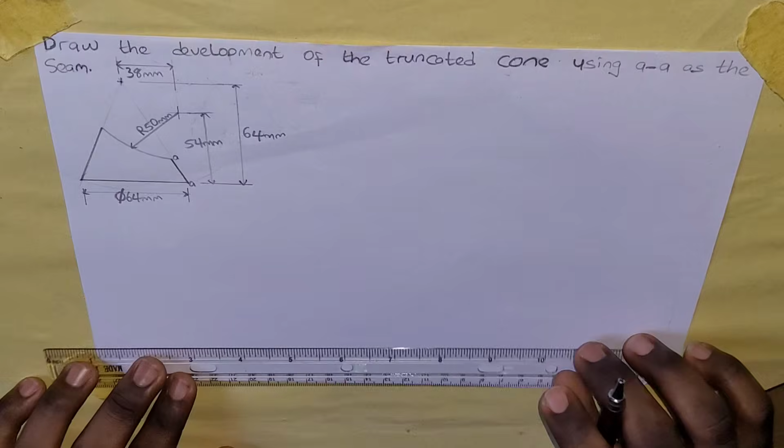Today we're going to be working on the development of solids. The question says, draw the development of the truncated cone using AA as the seam.

So this is AA. When they say using AA as the seam, it simply means we're going to draw the development done like this. They say we should draw the development of the truncated cone using this side as the seam, so our development is going to be done this way.

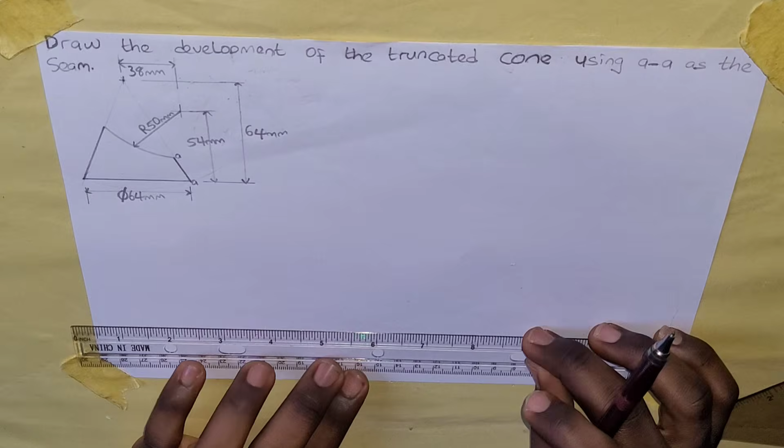The first thing we're going to do is get this shape on our paper. So we're going to start with a horizontal line.

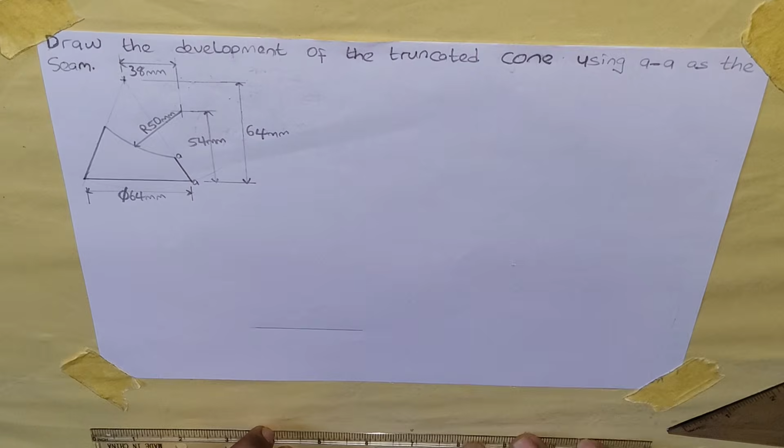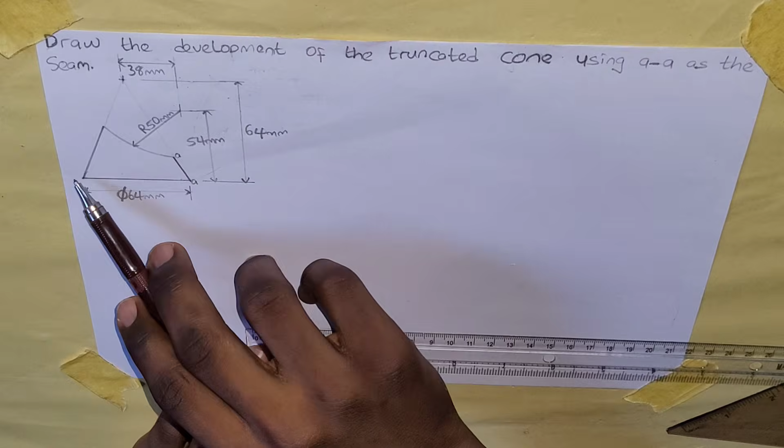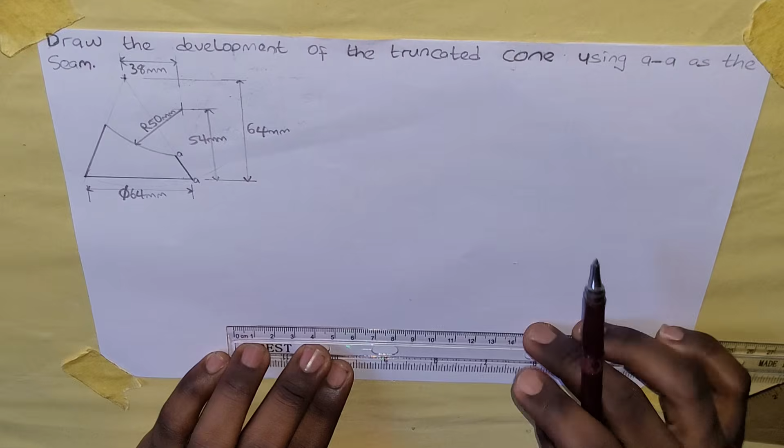On this horizontal line, I'm going to measure the distance from here to here, 64 millimeters.

Next, the cone is like a triangle, so in order to get this diagram, we have to first get the complete triangle. The distance from the base to the top is 64 millimeters, that's the perpendicular height. I'm going to find the midpoint of this line first.

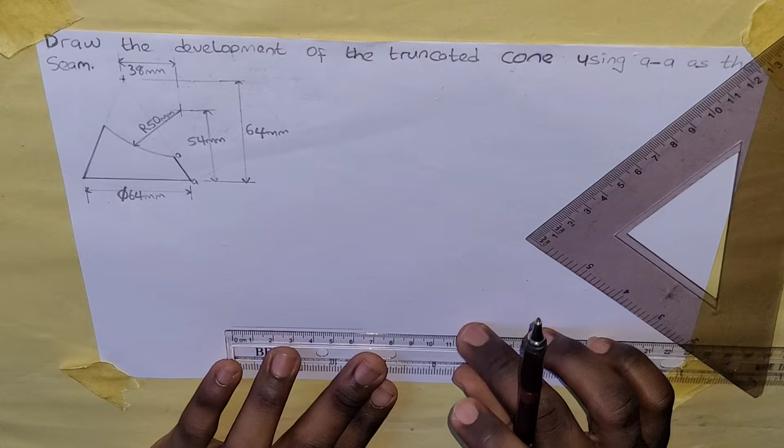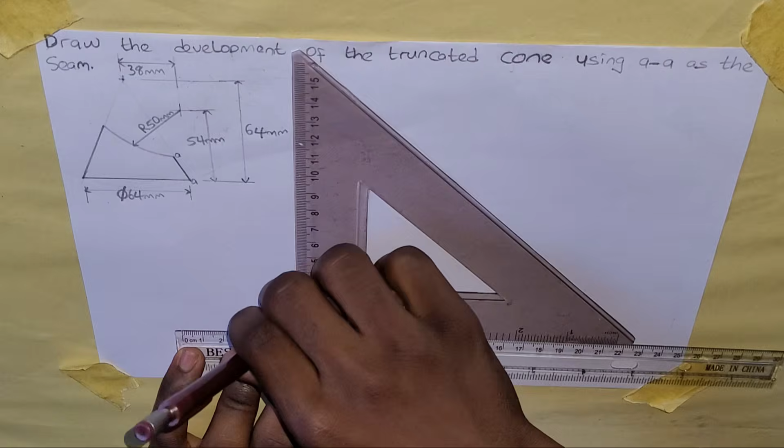Half of 64 is 32, so I'm going to mark 32. From this point, I'm going to draw a line upwards, then measure 64 millimeters on this line.

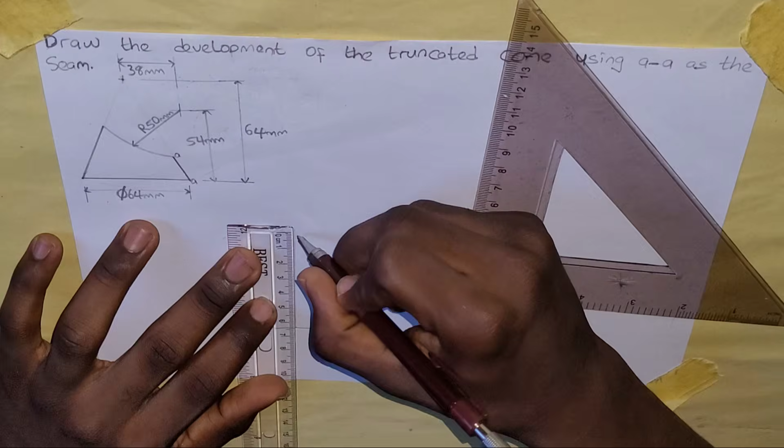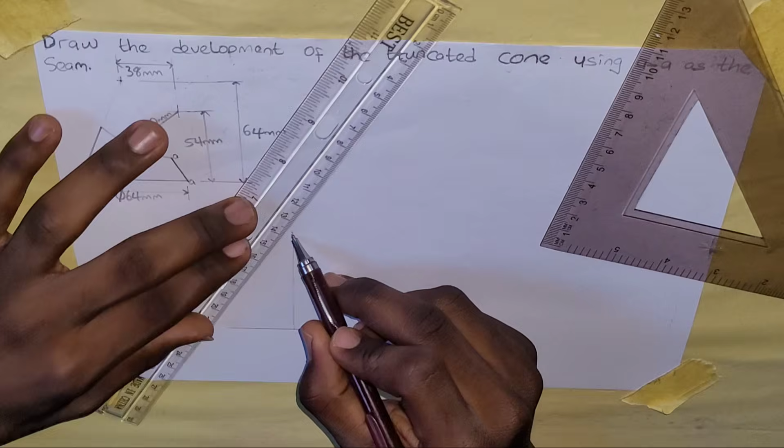Now from this point, this is where the triangle will be formed, so initially I'm going to draw this with thin lines, because this triangle is not the actual object we want to draw.

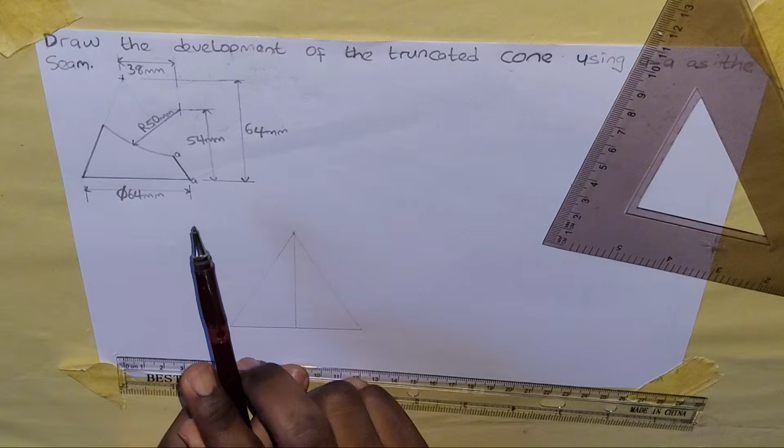The next thing I'm going to do is get this curve here. As you can see, they first got the curve. To get the curve, we have to get this point where our compass will be on, so we'll measure a distance of 38 from this topmost part.

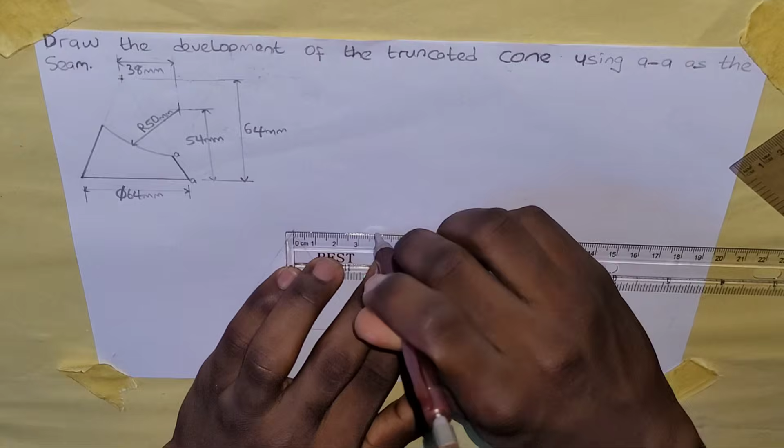From this point, I'm going to draw a line through it.

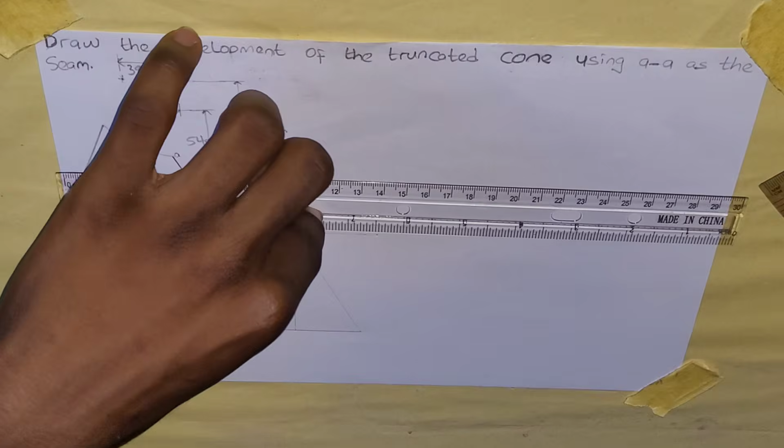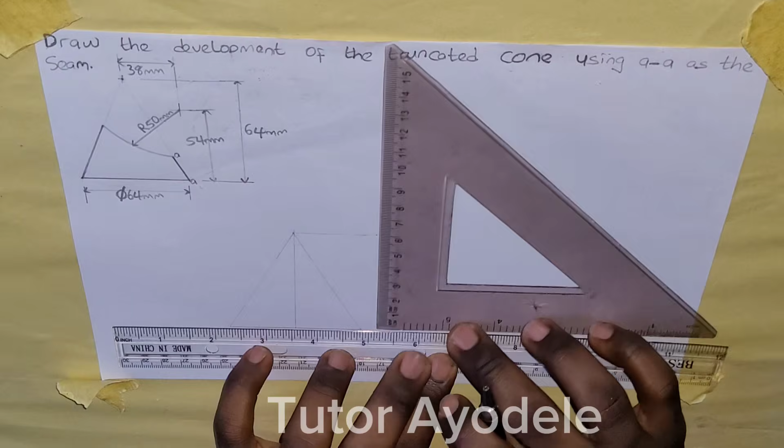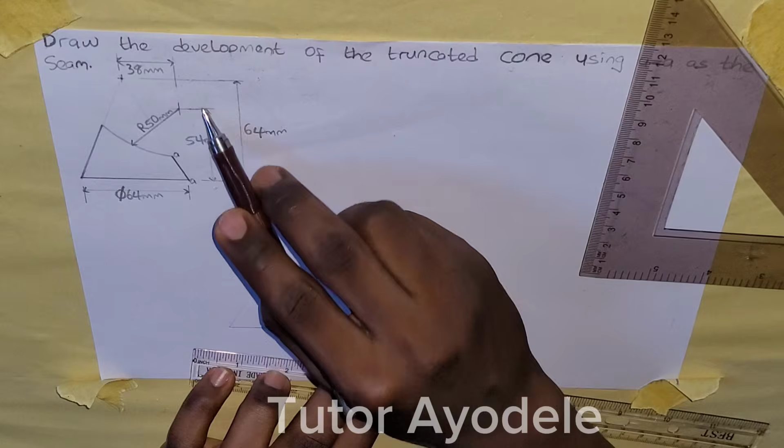So from the base to this point is 54 millimeters. I'm going to measure 54 millimeters.

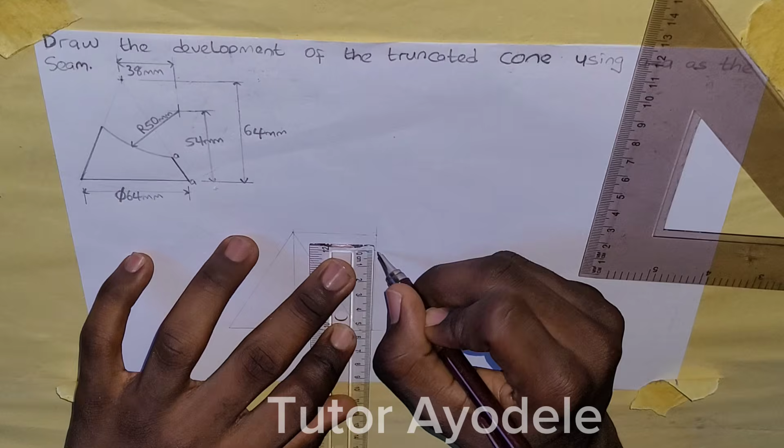Now from this point, using my compass with a radius of 50, we'll put it on this point and draw an arc.

So now we can take out the actual drawing. This is the actual drawing that we are meant to draw.

The next thing to do is, after we've gotten this drawing, we are going to draw a semicircle under this, at the base of this triangle.

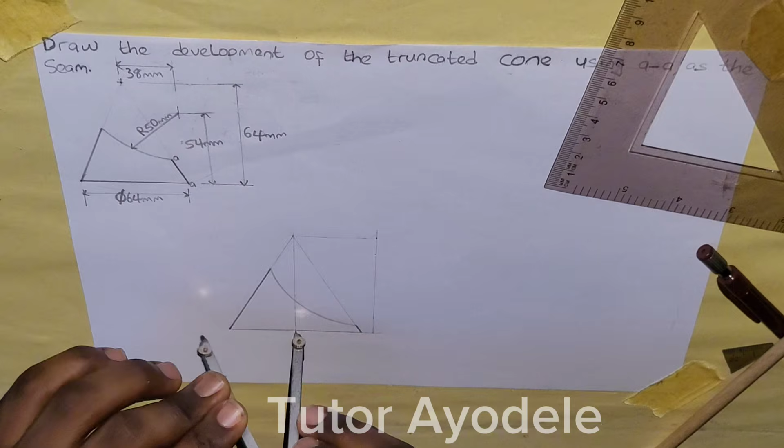Using our compass, we'll put it at the middle, get the radius, and draw our semicircle at the base of this triangle.

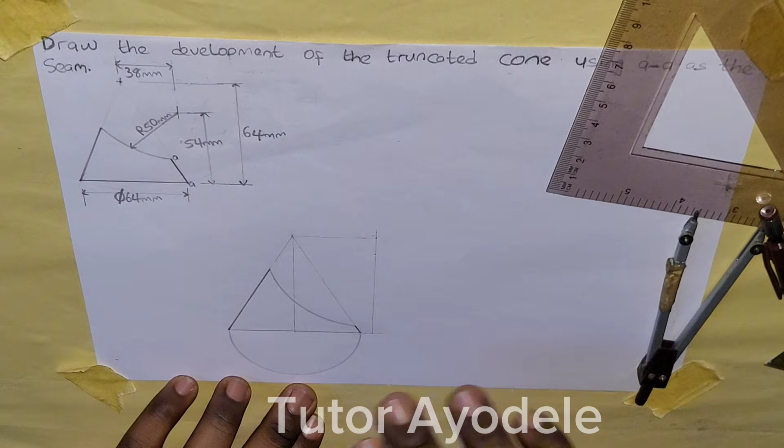The reason for the semicircle is because this is a cone, and because it's a cone, its base is like a circle. The cone, when divided into 6 parts, will have its divisions a bit different from the normal way a line will be divided into 6 parts. So with this semicircle, it can help us divide the line into 6 parts accordingly, because it's a circle. If it were a straight line, it would be equal, but because it's a circle, it's not going to be as equal.

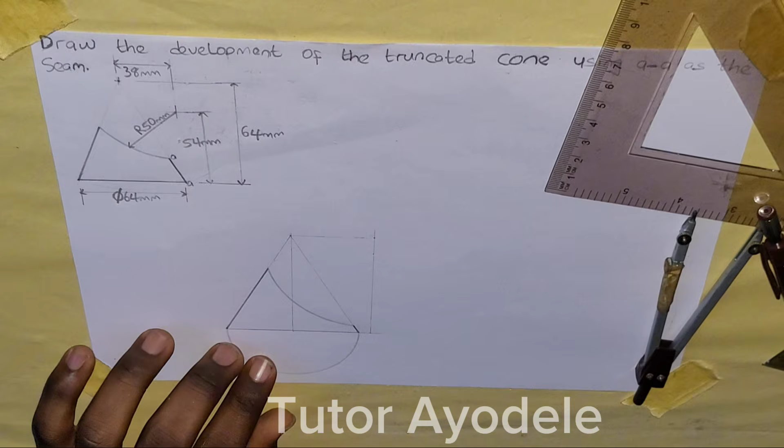So we're going to divide this semicircle into 6 equal parts. I'll put my compass here.

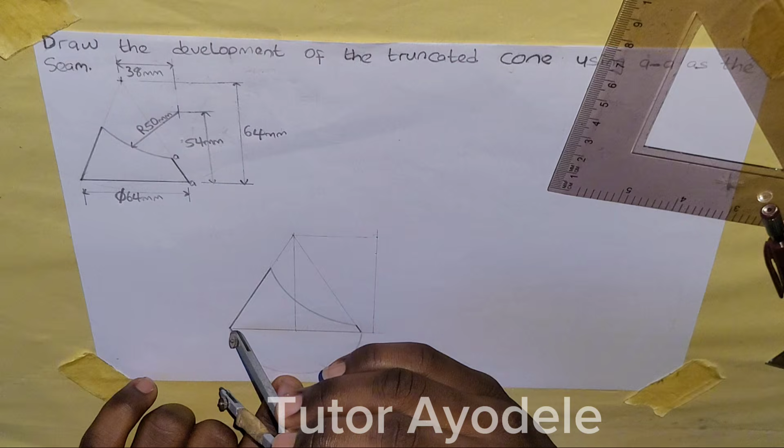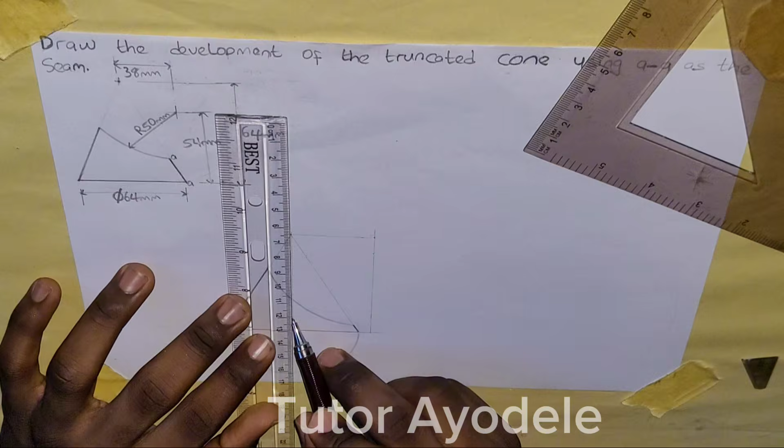I'll mark, then draw a line from the midpoint to the semicircle. And then from this point, I'm going to mark here and mark here. So we have these different points now: 1, 2, 3, 4, 5, 6.

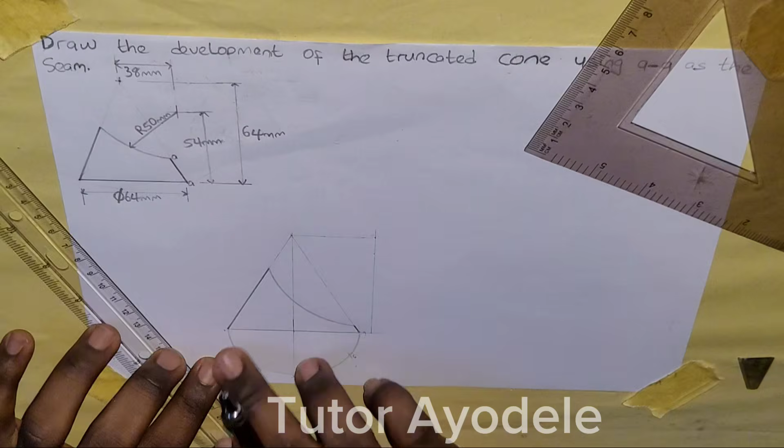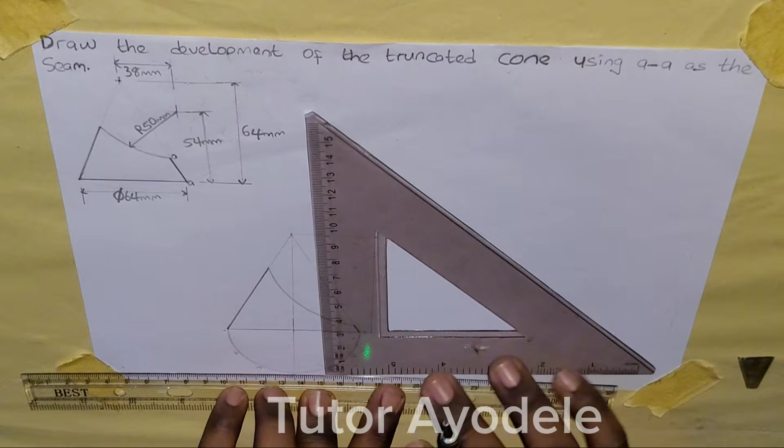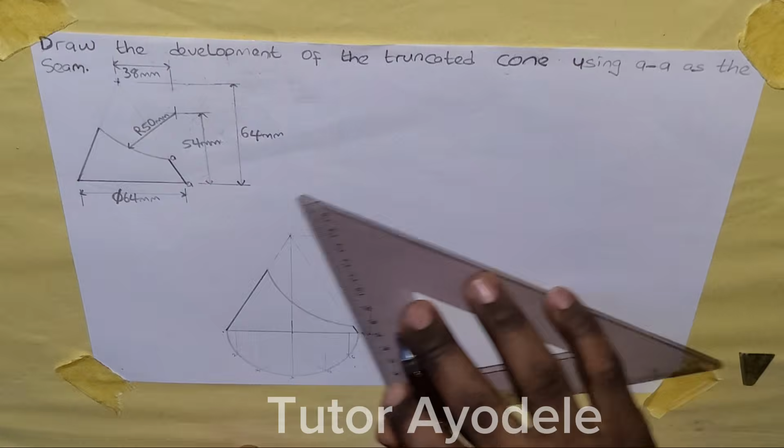So this was the point I was making before. If I were to divide the line into 6 equal parts, it would be more equal. But because it's a circle, this side and this side are not the same, this side and this side are not the same, this side and this side are not the same.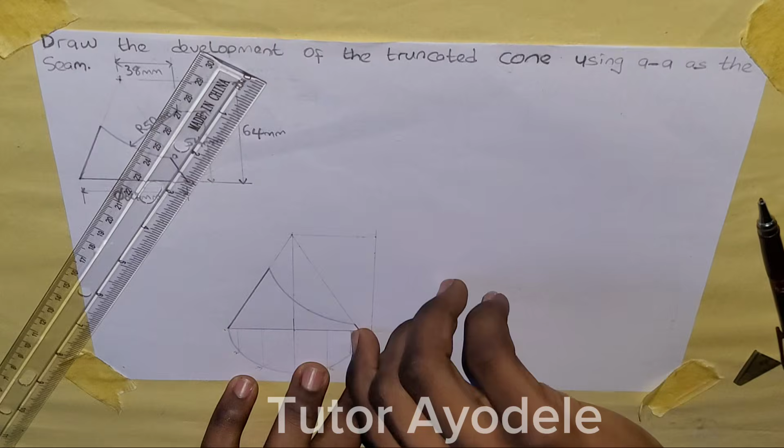Now from this point here, I'm going to draw it all the way to this center point on top, all the way to the top of the triangle.

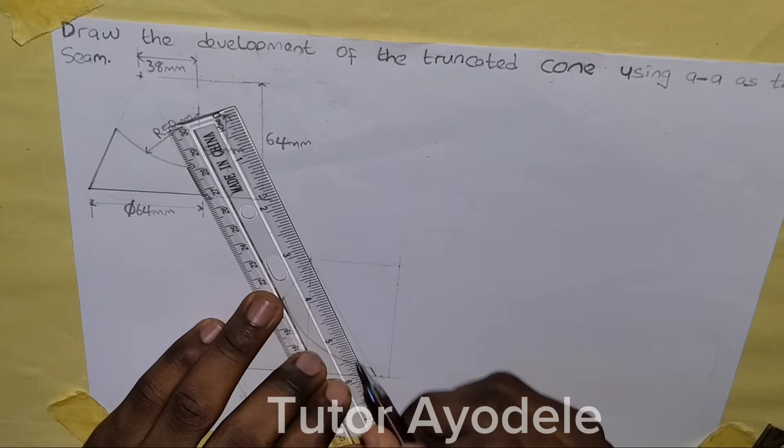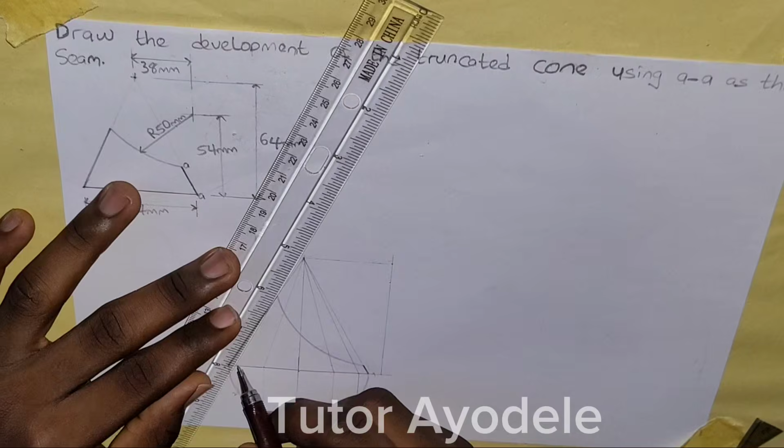Okay. Next we do it, next we'll move on to getting the development. So on this line, we're going to extend it a little bit over here.

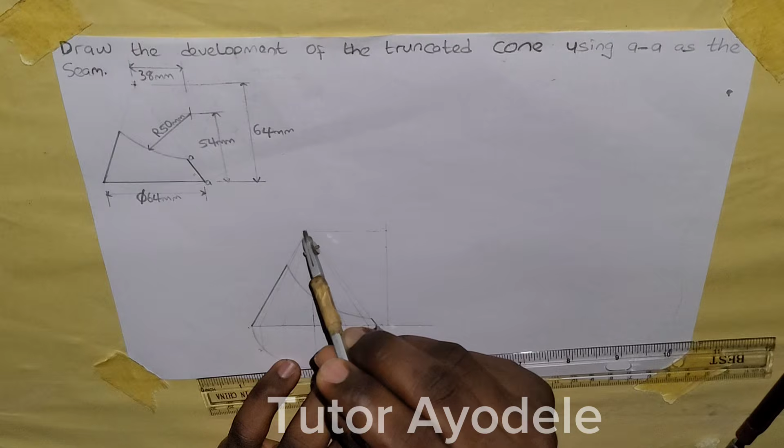And from any point we can choose any point. We'll just pick here. Then we'll use our compass. We'll first extend it to this point, that's the length from here to here. With that radius, we're going to mark an arc here.

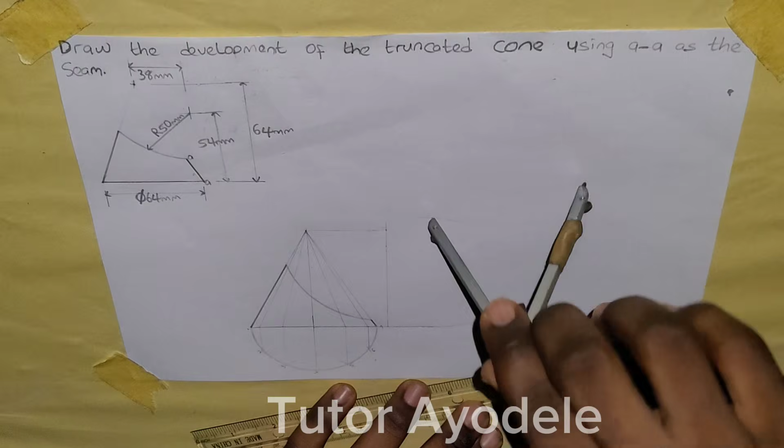After that, we'll put our compass on that point, on any point on that arc, and then we'll extend it back to this point we made here. Then we're just going to draw a large arc like this.

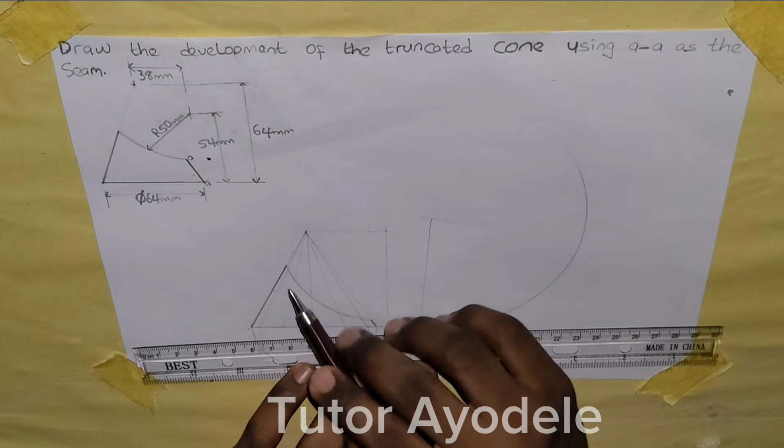Next, we're going to join this point here and this point here together. We're going to extend from this point to this point, from where this line, this picture, first of all, the object from this edge here to this line.

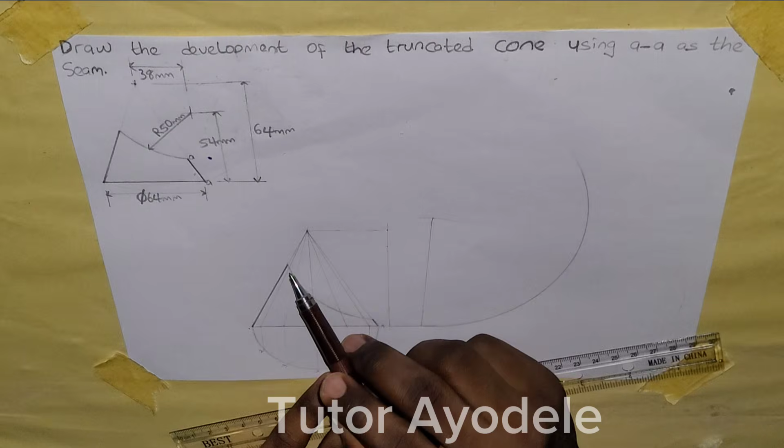Then secondly, where this thin line we've drawn inside meets the object here, where it meets this curve, we want to extend it to this line. Extend this here, extend this here, and extend this here.

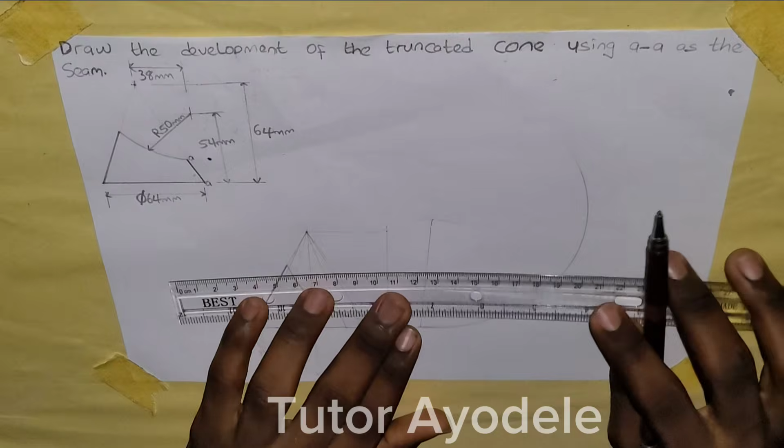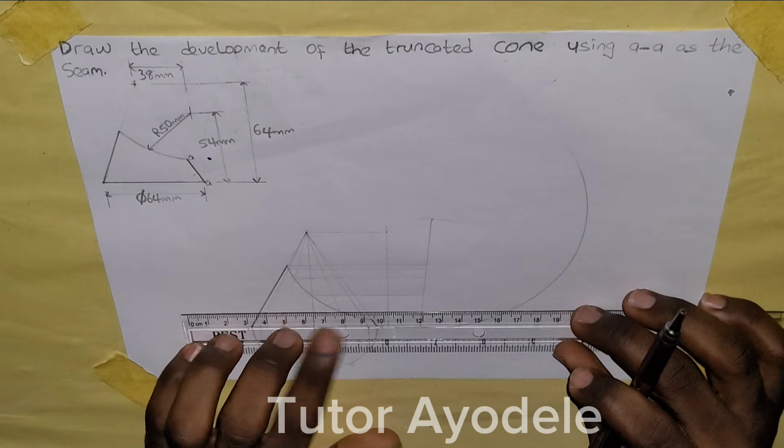So let's just start here. From this point here, I need to draw a line. From this point here, draw a line. From this point here, draw. From this point here, from this point, from this point, and then finally from this point here.

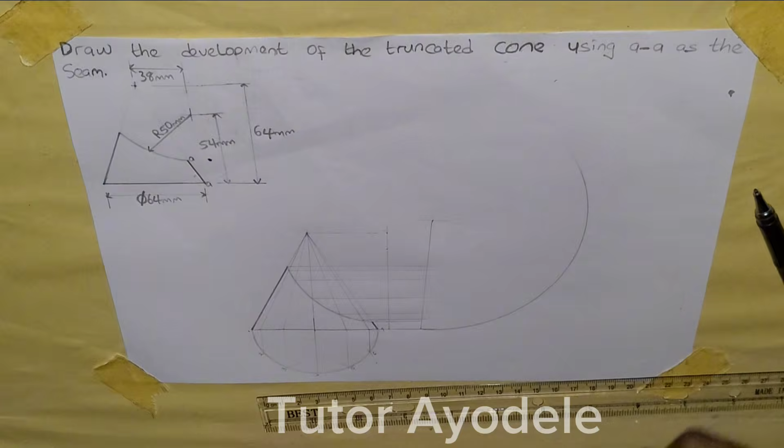Once we've gotten all these points, using our compass, we're going to put it on this point we marked here before, we're going to put it there. And then from all these points, we're going to use our compass and draw curves this way. So from this point to the first one,

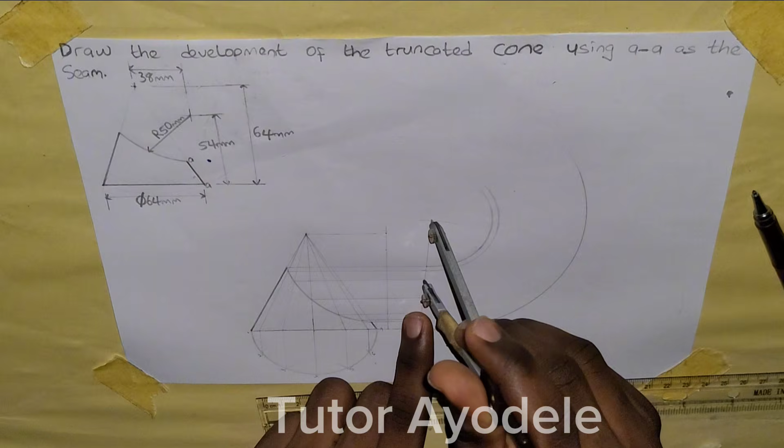we're going to draw an arc. From this point to the second one, we're going to draw an arc. From this point to the third one, we're going to draw an arc. This point to the fourth one, we are going to draw an arc.

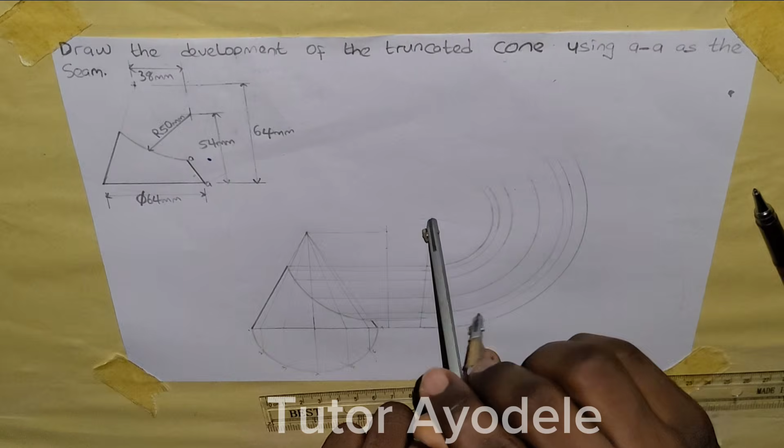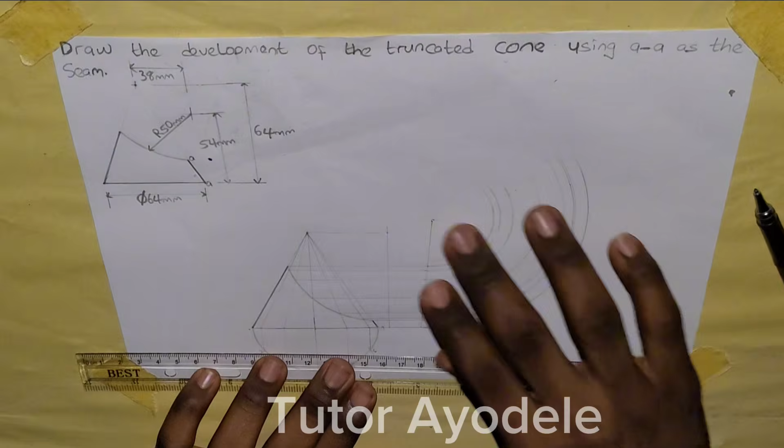So we've gotten that part now. Another thing to do now is to get the demarcations on this line. So from the middle point here to this point here, either this point or this side, we're going to come here. And because we divided this line into 6 equal parts, we're going to make 12 demarcations here.

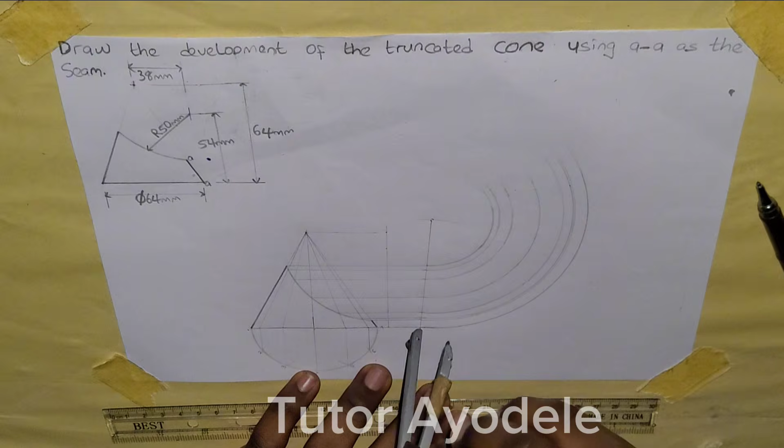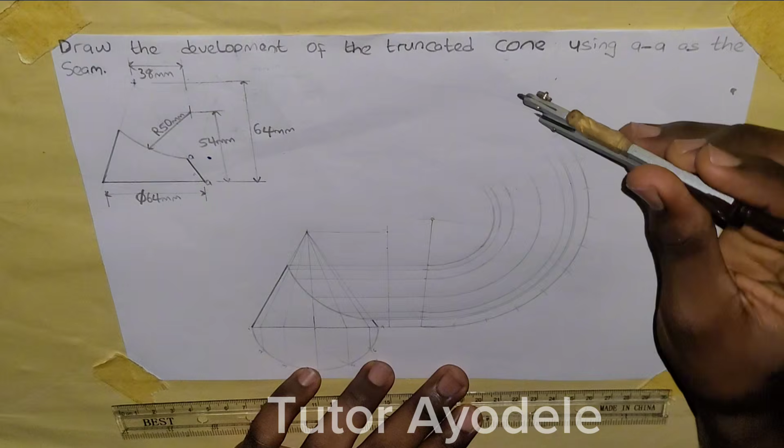So use 1, 2, 3, 4, 5, 6, 7, 8, 9, 10, 11, 12. Now where it ended here, we need to join it to this point here.

So it forms this fully extended cone. And I'm going to extend all these parts down to the end, so from here to here.

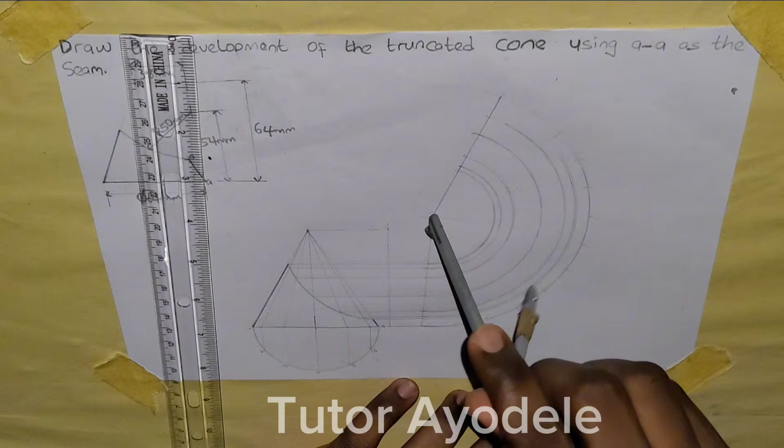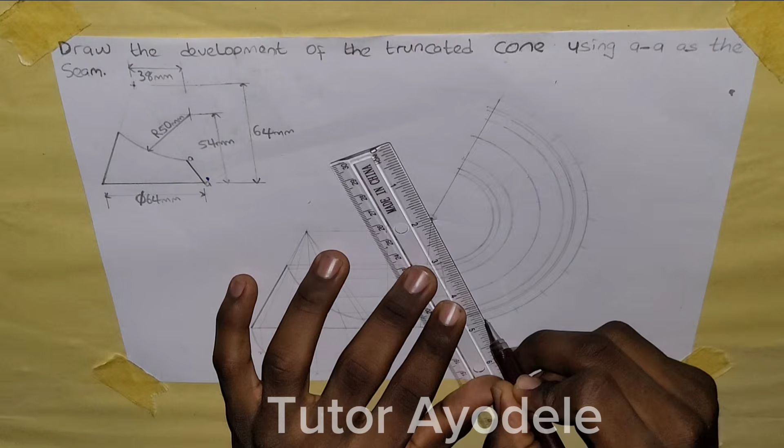Okay, now from all these demarcations we've done here, we're going to draw them to this center point here. So from the first one, we draw a line. From the second one, draw a line. The third one, draw a line. Fourth one, draw a line. Fifth one, we draw a line.

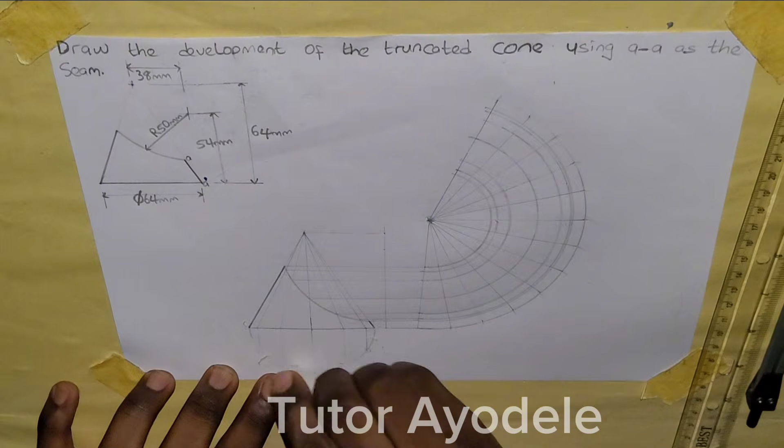Now, from the first line, let me number these places again. 0, 1, 2, 3, 4, 5, 6.

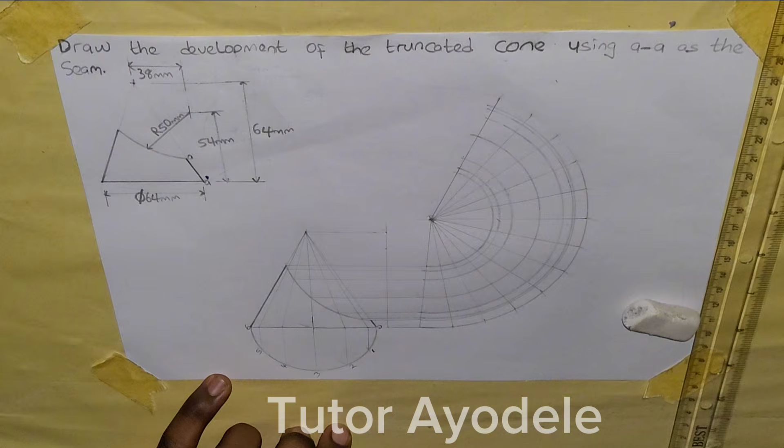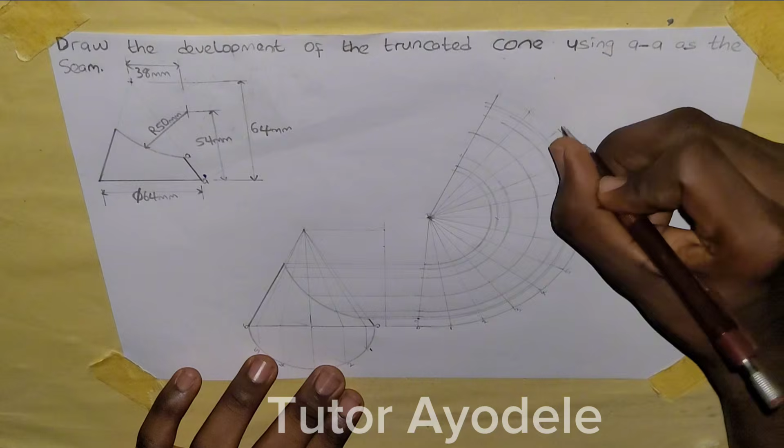From this point here, 0 to here, mark it 0. Mark that point 1. Okay, 0, 1, 2, 3, 4, 5, 6, 7, 8, 9, 10, 11, 12. So 0 to 0, 1 to 1, 2 to 2, 3 to 3, 4 to 4,

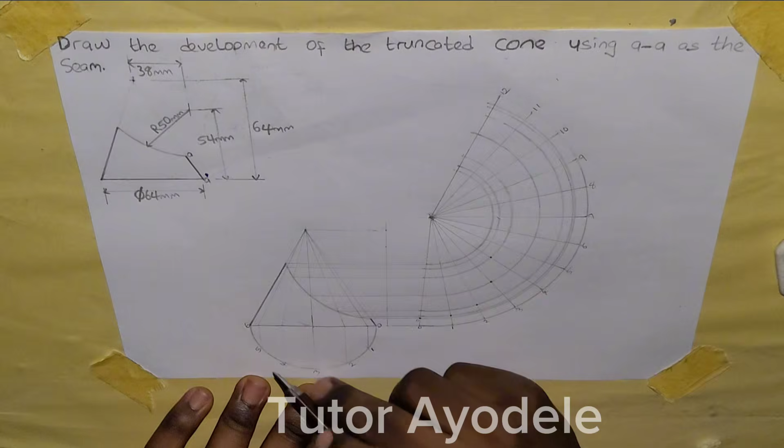yeah, 5 to 5, 6 to 6. Continue like this. 7 to 12 is like 5, 4 to 0. So, oh, let me write it that way.

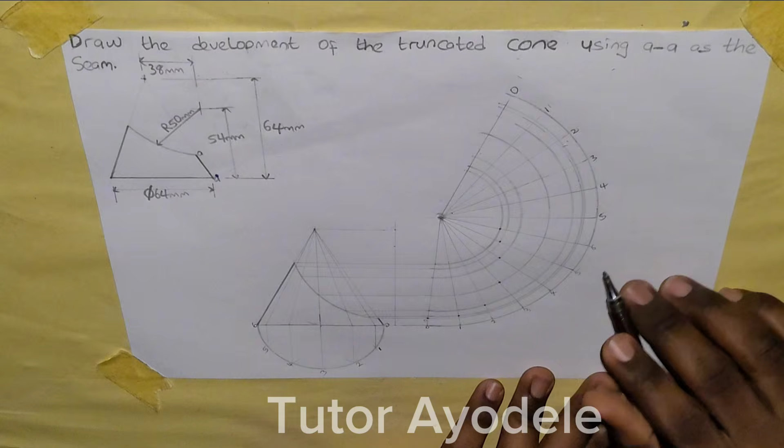Okay. So after 6, I'm going to get from 0 to 6 and then from 6 back to 0. So that's 6, 5, 4, 3, 2, 1, 0. This makes the work easier.

So after number 6, we'll just go back to number 5 and then keep counting like that: number 4, number 3, number 2, number 1, and eventually 0. Lastly, we are going to use our French curve to get all of these together.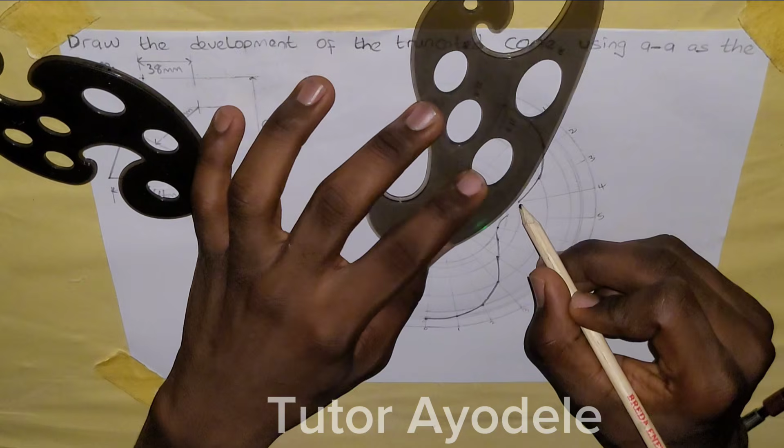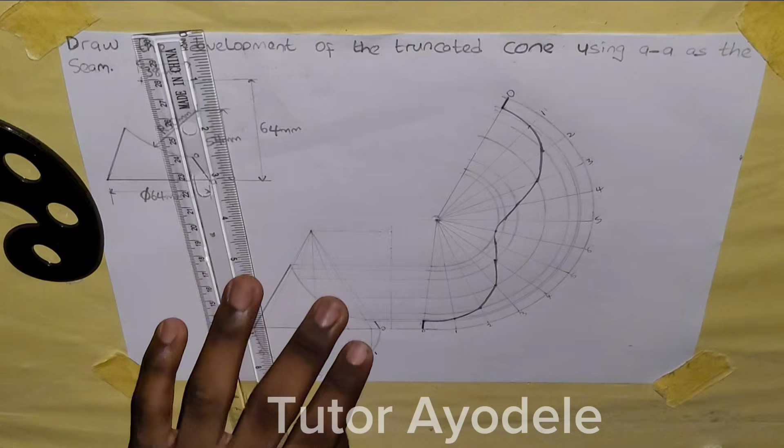We're also going to thicken out these lines on the arc of the circle. So I'm going to make this arc bold.

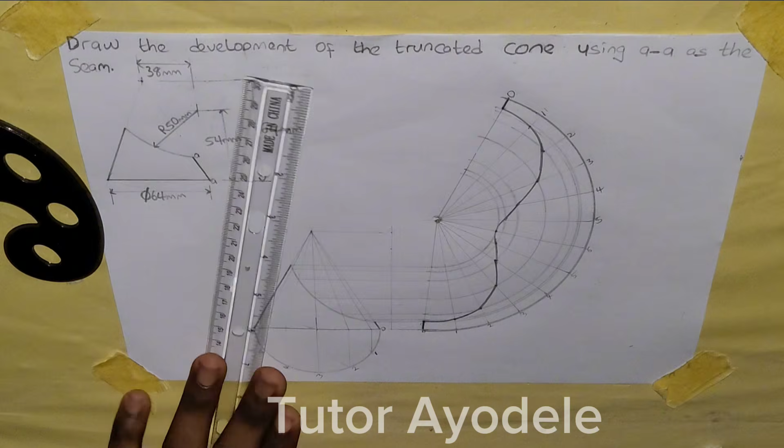And the next thing we are going to do is dimension our work. So this diagram here is the development of this truncated cone. The next thing we're going to do is to dimension our work.